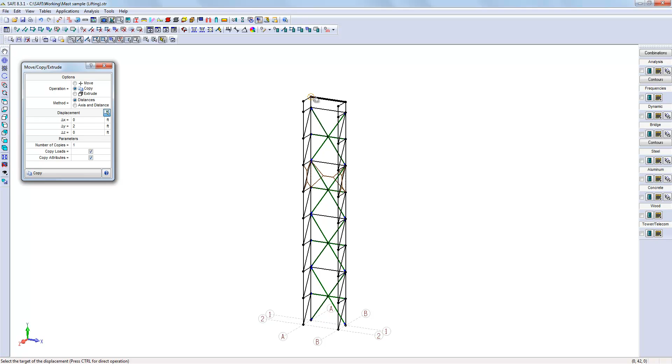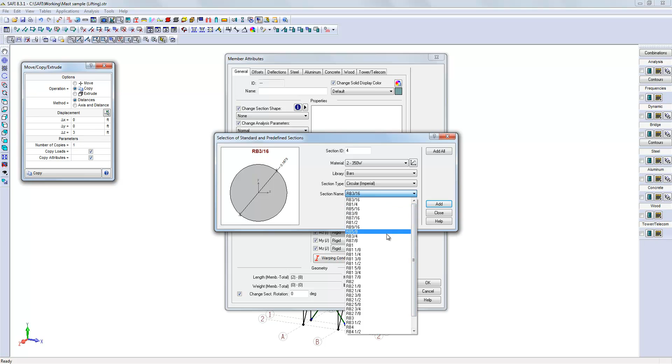Then, we will assign some sections to the new extruded members. Let's create a new standard section from the bars library. Let's say it is a 1-inch circular bar. And then, let's say that the new frame here will be supported by one single point with cables at the top of that.

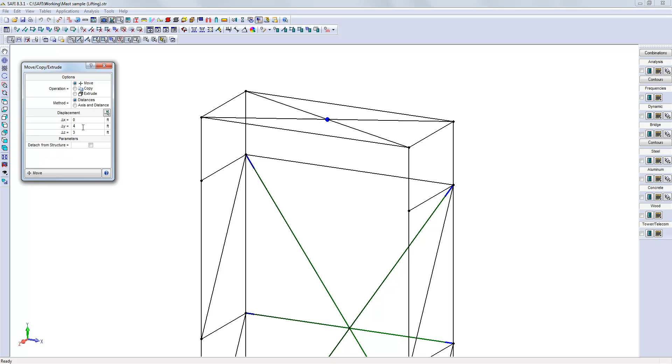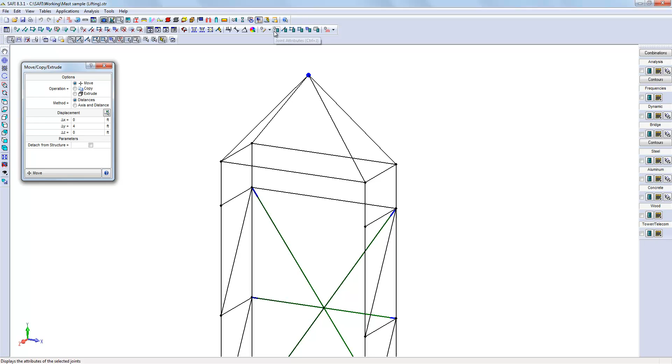Let's add here the new members. Make sure they are cut in independent members so they are acting as separate members. Then, I will move this point, let's say, 4 feet above the existing structure. Let's apply to those members the same circular bars as the members done before. Let's assign a support there. Let's suppose it is a fixed support.

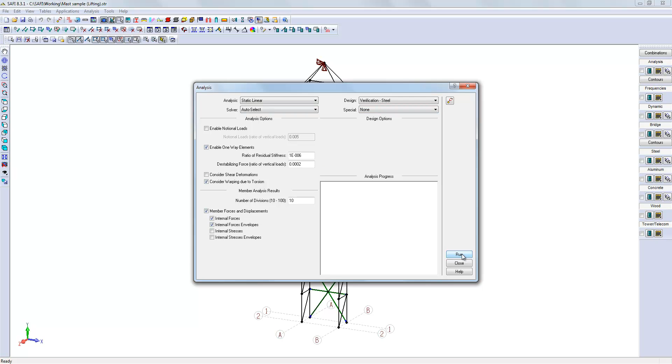Let's try to analyze that as it is now without refining the model. By experience, you will see that this will not work very well. It is a step to show that there are other things to pay attention to. Let's run it like that. There is a warning: verify structure stability. Joint displacements are high. Do you want to continue? I can click yes and continue, and you can see that there are very large displacements.

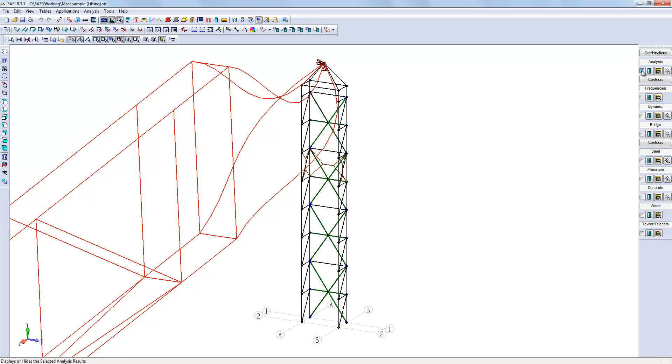If I display the structure displacements, it is not something you would like to see. It means there is something missing in the model. In addition, we also forgot something. These cables need to have bending releases. If they do not have hinges, they will develop bending moments at their ends, and this is not corresponding to the behavior of cables. So we will add hinges at the end of these members.

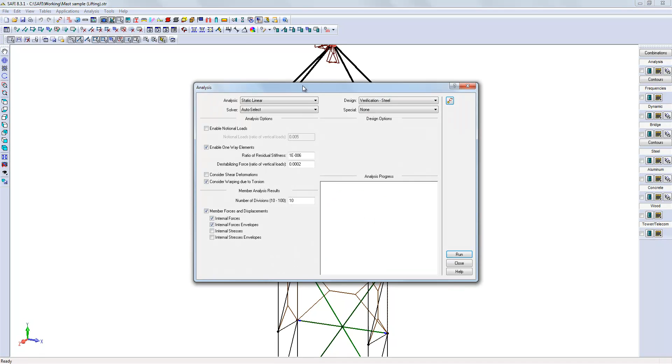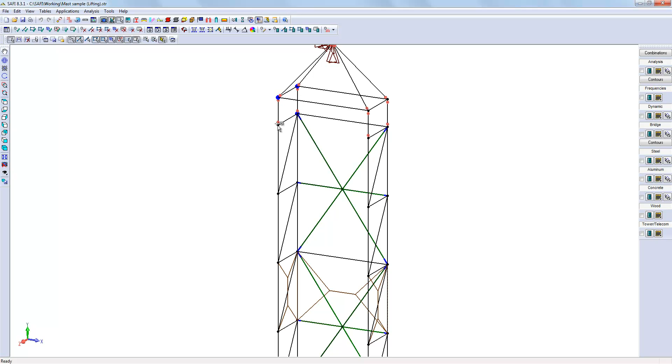Let's run it again. It should be even worse now. I'll get another warning saying displacements are very high and the structure is almost completely unstable. An easy way to fix that would be to add minimum spring stiffness at different positions. These springs are artificial but will stabilize the structure to see its behavior. Let's add a few springs along the X direction on the left side. For example, specify a very small rigidity of 100 pounds per inch. Let's do something similar for the Z direction for other points here.

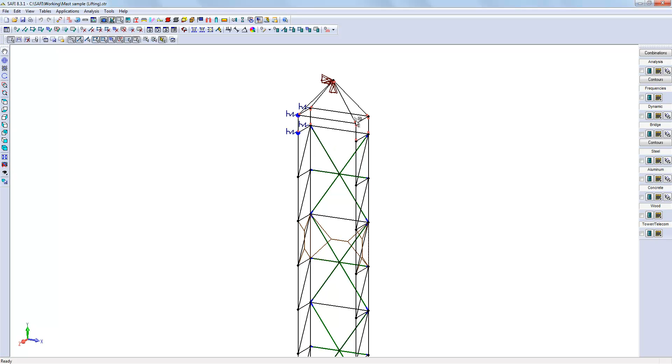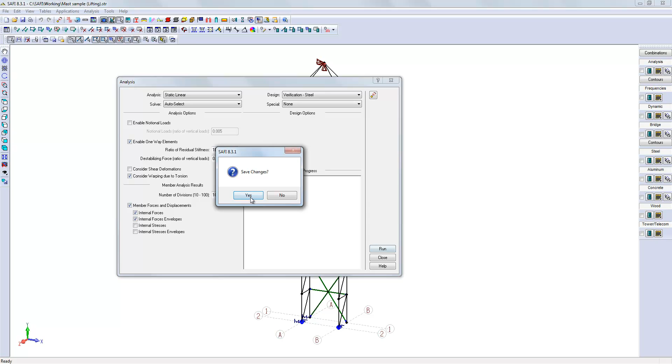And reanalyze the structure. It seems no warnings have been displayed. Let's take a look at the displacements. It is much better, although it is still not perfect. I am looking at the structure from a front view. Everything seems to be correct. From a right view, I still see something that doesn't seem to be correct.

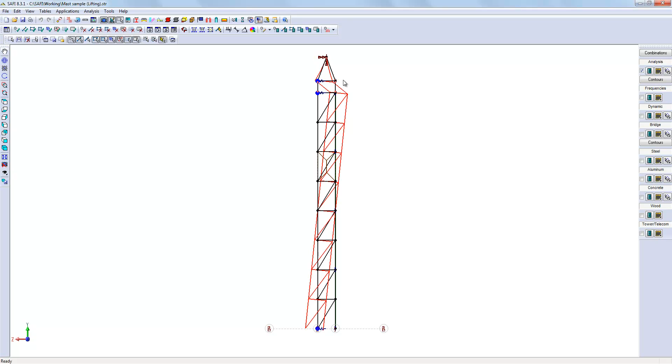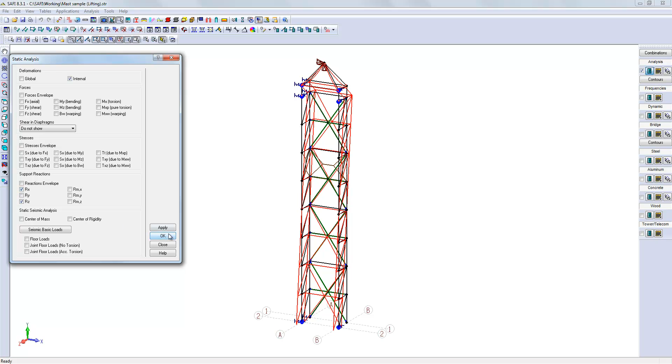Let's take a look at the reactions. The internal deformations are already displayed. Let's take a look at the horizontal reactions, mainly along Z because it is the direction where we see displacement, and also along X. You see here there are small reactions. Let's just display reactions along Z. We get here 25 pounds, which is not so high, but it also means that if the spring were not here, there would be some rotation of the structure.

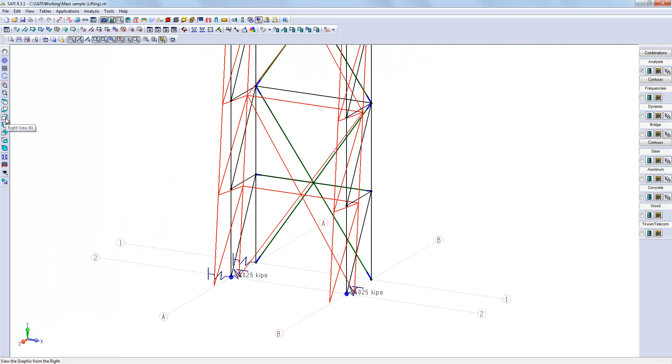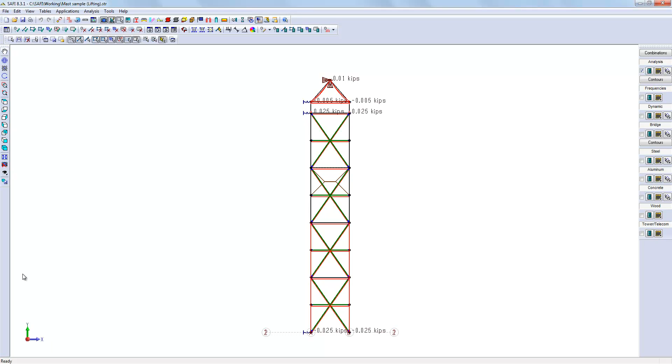Why do we get this rigid body motion of the structure? It is because the supporting point is not exactly above the CG of the structure. We should move that point so it is located exactly above the CG of the structure. To identify that, let's try to calculate the load CG. It seems that the CG is correct along the X direction, but not along the Z direction. We will verify the CG in that direction.

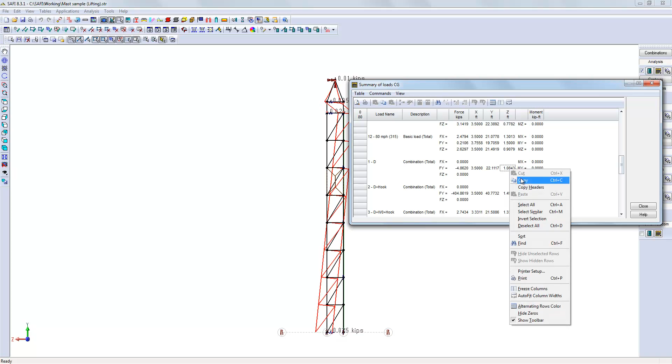If I use the Calculate Load CG command, I can see the CG per basic load or per load combination. I am now looking at the reactions for combination number 1, including everything in load combination number 1. This is the CG along X and Z for this load combination. So, I will copy this Z coordinate and I will set the joint coordinate Z equal to that value. Let's reanalyze the structure using that new location.

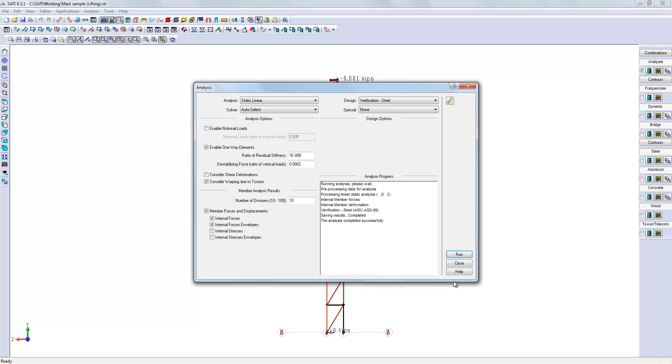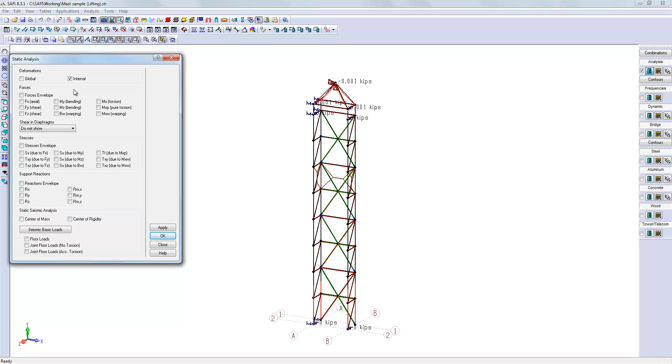Now, we seem to have very good results. You can see that there are no more reactions on the springs. So, there are no more displacements and no more horizontal reactions. The structure is now supported from the top. Let's have a look at the axial force to see the behavior of the structure. Let's activate the axial force on the members. We will adjust the scale; we'll put 1 kips for axial forces. Now we can see that the axial force is at maximum tension at the top, and in the cable it reduces to almost 0 at the bottom.